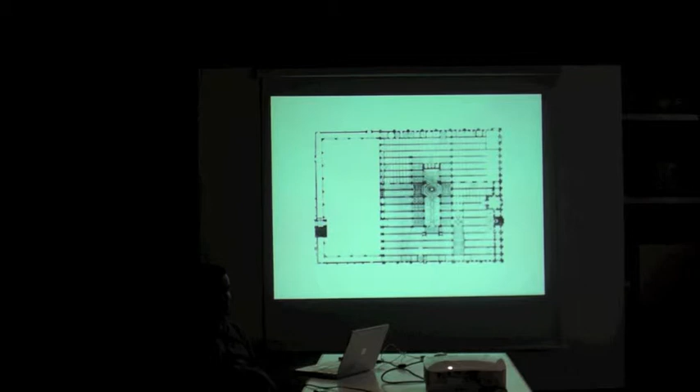Short time, as they say. Thank you very much, Jan. It's a very pleasant introduction, and I'm very honoured to be able to speak as part of this series. By no means was it ever meant to be a self-promoting exercise to include it in the Lecture SAUL series, but as it happened, we felt it was important to include some examples of recent architecture that has been headlining various matters.

I'm going to talk tonight about our only competition winning scheme in the office. We've been in practice now for 6 years, myself, Crevan as directors, Joan McGilligan as our associate, and all our many collaborators, many of whom are here in the audience. We always like to have SAUL students, and most recently Aidan O'Dea, our year-end student, was instrumental, I would say, in this competition, in his model making skills and drawing.

They say that it takes about 10 competitions to enter before you win one, and that's exactly what happened with us. We entered 10 competitions to date, and luckily enough, this has been our joy, particularly in very, very difficult times. We find, as a very young practice, it's very, very difficult to get public work of any sort, because primarily government bodies and other public clients don't trust - maybe that's a little bit hard to say - but you don't have a track record. And looking to other European countries, there is a precedent of supporting young and up-and-coming practices, and the only way, and an invigorating way in Ireland to get work, is through competition.

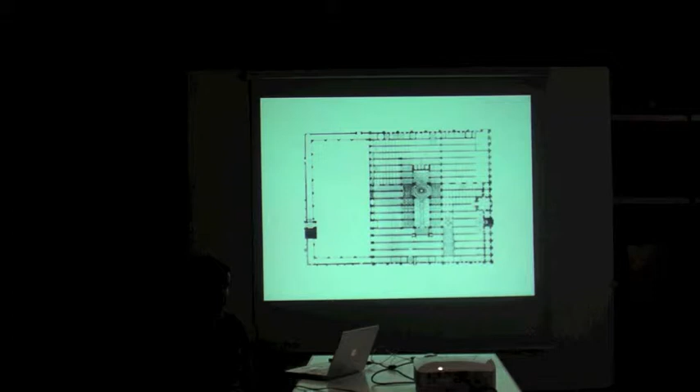There's only 2 or 3 competitions, maybe 4, maybe 5 every year, and they vary in scale from playgrounds right through to civic offices. Our professor here, Merritt Bucholz, is a prime example of somebody who has gained tremendous experience and a breadth of scope of work from that competition process. So I feel like I'm a child of all of that, still in my almost 40th year.

Without saying too much further personally, this competition happened during a very difficult personal time emotionally for me, in that my brother passed away in March of this year. So I was primarily focusing on this competition as an emotional outlet, if you like, a vehicle, and certainly his energy and his enthusiasm for life shows through, I hope, in the competition, and he'll always be remembered for that.

So I'm beginning with a building that has fascinated me since my beginnings as an architecture student, and you'll all be very familiar with Cordoba Mosque. It's the Cathedral Mosque, they call it, because it's an overlay of a Roman Catholic Christian cathedral onto a Muslim mosque. Rather than talk about the symbolism of the cross within the plan, it's primarily its abstract nature that has always fascinated me.

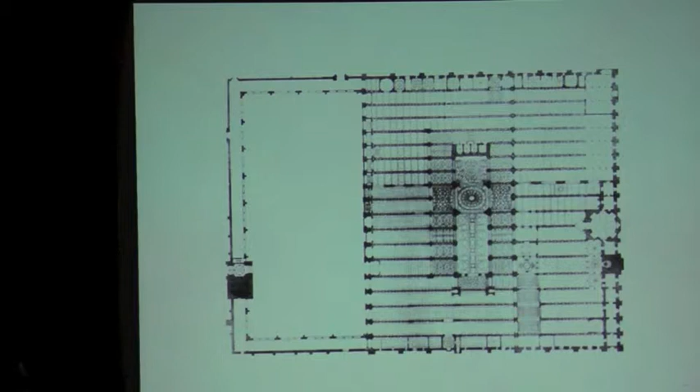It's a building of 856 columns in total, from varying stones such as jasper, onyx, marble, granite. A very, very simple perimeter wall, a very platonic shape, if you like, and that has always attracted me.

It's a monumental building of many kinds. But what interests me most, I suppose, is its multiple uses. It's not just a place of worship over time, from the Al-Andalus Muslims to a place of gathering.

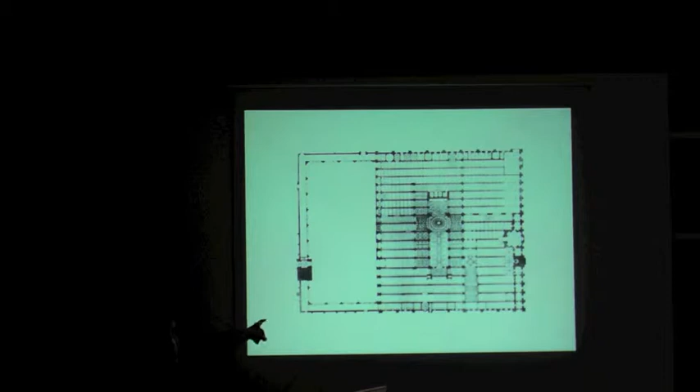In the Plaza de los Naranjos, here in the courtyard of the mosque cathedral. And it was also a place of learning, and they used to teach varying kinds of groups of people in this hypostyle hall, a multi-columnar hall. And it was also a place of prayer.

You have many prayer niches, and you have the mihrab facing unusually south as opposed to southeast, east towards Mecca. And it was also a place of law courts. So in many ways it was this very, very important civic building, and it was an open carpet, if you like, large forum in the town.

And for that reason, it has always fascinated me. And it was one of the reasons why I went to Spain to work. I am fascinated by the mixture of both Muslim architecture and early Christian to late Christian architecture through the Reconquista. And they have an incredible heritage that's there, and it's still used.

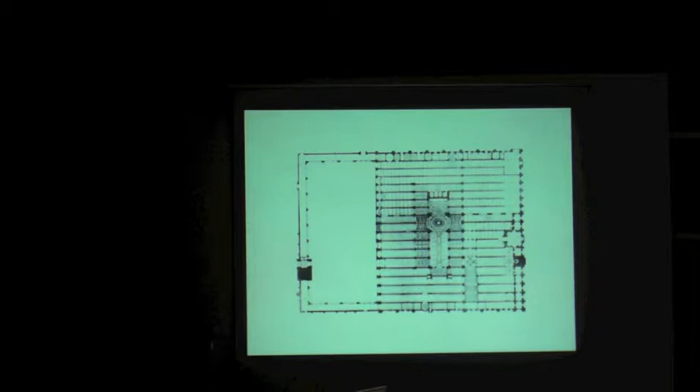And I suppose I'm showing this here primarily to show the extent of the ground floor, and the fact that the section is divided into two zones. You have the column and you have the arch. And it's effectively 3.5 meters and 3.5 meters again of a zone.

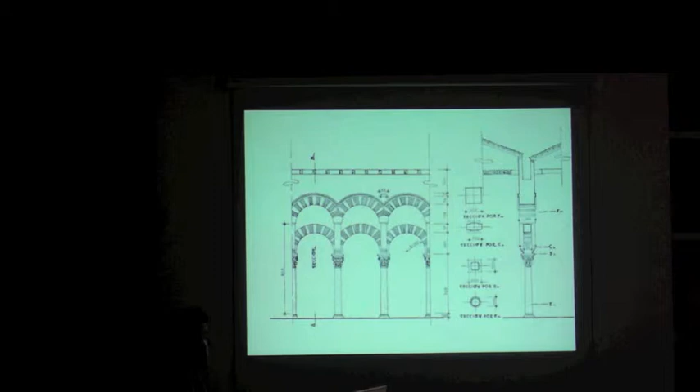And what I like probably most about the mosque itself is its juxtaposition with the old Jewish quarter of the town. It's this very forceful, square, platonic shape that hits and meets streetscapes and makes all these wonderful urban spaces almost accidental the whole way around its perimeter, while holding on to this very, very clear, formidable shape in the centre of the town.

And it's something that has kind of lived on in competitions through our office, and I'll show one or two examples of that in a moment.

The other project that I've always been fascinated with is the Danteum by Giuseppe Terragni of 1938, and he was asked by, or maybe forced, some people would say, by Benito Mussolini, and Terragni was Mussolini's state architect of the time, to build a monument to Dante Alighieri, who was a poet, who wrote the most beautiful poem of many people would say of all time, the Divine Comedy.

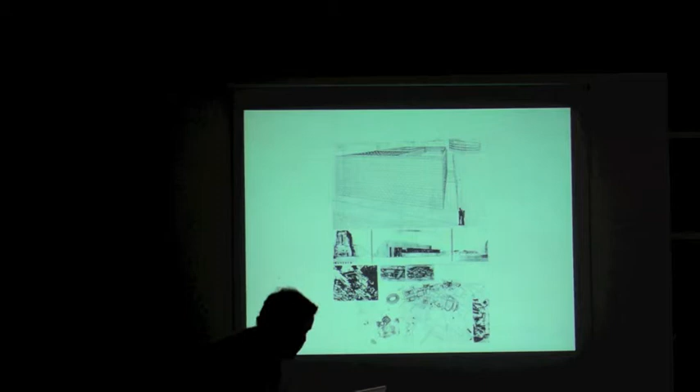And you can just make out the Danteum here. And unfortunately I couldn't get a site plan that would have more focus, but it's ever so tilted and linked to the local context. So it sets up this very, very energetic shift in plan. And in a way it is, I suppose, a metaphor for all the shifts and toing and froing of all the emperors that have made impact on this part of Rome.

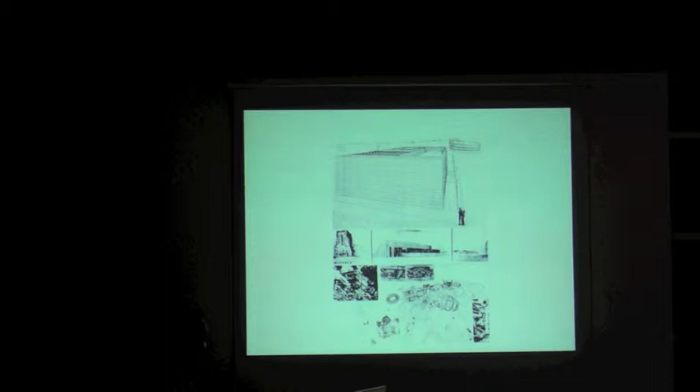What I also really like about this building, again, is its very simple, clear form and its tectonic. Immediately you can see there's an interest in the making of the building. And down to its coursing of ashlar stone, you can see the banding of a band to 3 bands to a band to 3 bands. And the various staggerings and coursings of the stonework on the outside elevation.

But equally intriguing is its plan, and something that I've always been intrigued by. No model or drawing will ever kind of satisfy my intrigue for this plan because it's so mysterious and abstract. And I suppose it was a translation of a translation.

Dante's Divine Comedy was very much structured around Byzantine churches, as it is said to be. And this is a translation of that translation in that here is Terragni thinking about the structure and the rhythm and the form of the Divine Comedy in a path from dark hell through purgatory up into paradise.

So you have this very interesting intramural relationship between spaces. You don't know whether you're within a wall or within a room, or whether the wall is supposed to be read as a singular wall. It's a very intriguing thing, more about the interstitial space - try to describe anything in there that is interstitial.

It's almost like every corridor space is useful of some nature. I particularly like the strong graphic of this multi-columnar space up on the top left through to the massive columns of purgatory, this weighted ceiling, and this very interesting section up above - quite a compact form, yet spatially rich and intriguing.

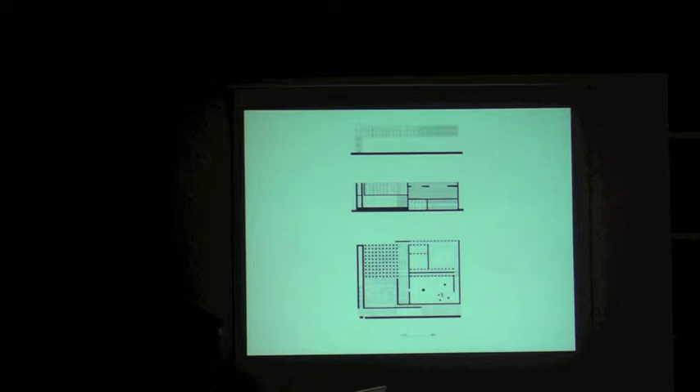If I can jump onto a project which we almost won last year, the Europan project in Ballymun in Dublin. They were looking for 50 residential units and the reuse of a boiler house, which was the central heating plant for all of the local authority flats in Ballymun.

Rather than knock the boiler house, which the majority of the contestants decided to do, we decided we would keep both the chimney and the boiler house - vestiges of that latent history that Ballymun had and is beginning to lose slowly but surely because of its regeneration programme.

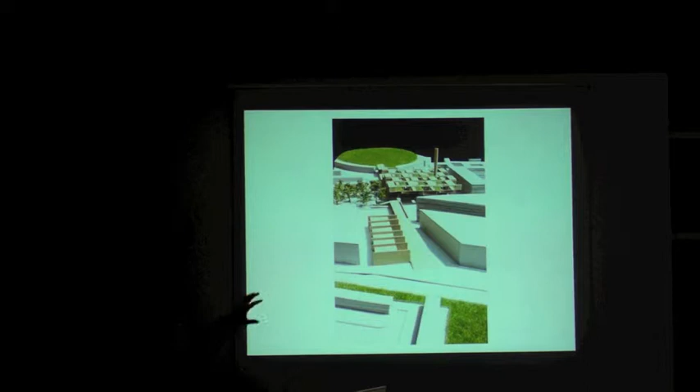So we proposed this very strong square form - something that appears a lot in our work, this simple form. A bridge that connects a number of intended linear parts across Main Street. It was meant to be a counter-axis, interlocking with this floating roof which had penetrations within it to allow light to come through.

I cannot say how important another student in the college year was to this project's development, and that's Sinead O'Shaughnessy. I don't know whether Sinead is here tonight, but she was instrumental in this project coming to fruition.

Like a competition, you only have two or three weeks to throw your hand at something, so you really are using all of your capacity and ability within a very compressed, shortened time, and under many demands as well, given that we have the practice and that we all teach as well.

A very simple metal form with concrete pours that kind of mimic, or have a mimetic relationship with, the concrete column of the central boiler house.

We turned that into a studio, and we kept the red colour because of this very distinct emergency red colour that it had. And the chimney, being close to Dublin Airport, was to uphold its kind of red and white branding.

So Tullamore - a place I had actually never been to. And John, I swear if you tell this to anybody or Offaly County Council - a place I had always had very strong desires to go and visit because I had heard it had a very striking architectural built heritage, and when I went there I was not in any way disappointed.

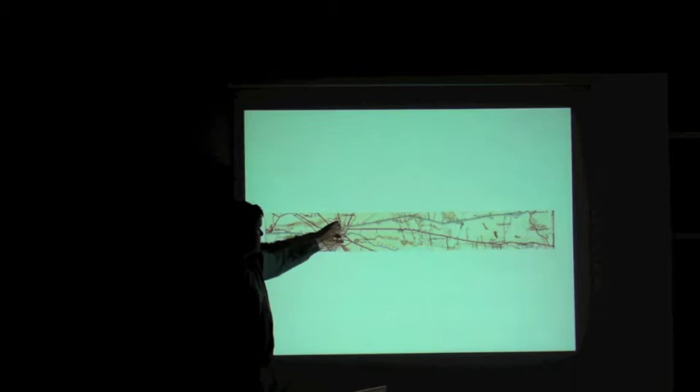Beside it, you can see the small green spot within the town, slightly in the backland, not necessarily the most important part, but you have the main street here, Columcille Street, and Patrick Street, with various important churches around the town, and this wonderful Charleville estate that holds the Castlepalooza event every summer. So a very interesting setting.

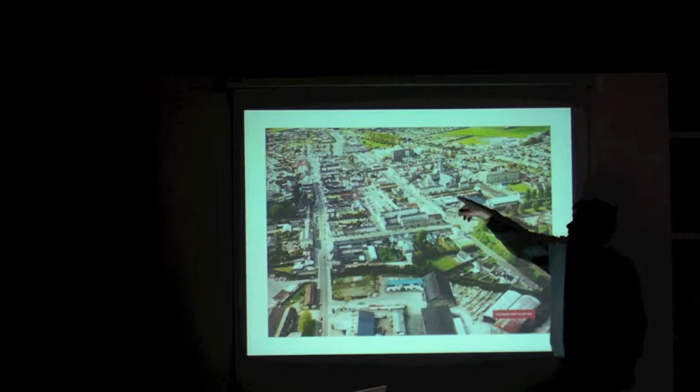This is the town itself. You can see the basin I was just describing, about 45 to 50 square metres in size to allow for the barges to turn and go back out. It would have been a miniature version of the Grand Canal Basin in Dublin, so you had this kind of relationship immediately with Dublin.

Quite a formal street. You can see very fine urban spaces like Market Square, and the main street leading on towards the jail and all of the later 19th century extension of the town out towards Carroll Estate.

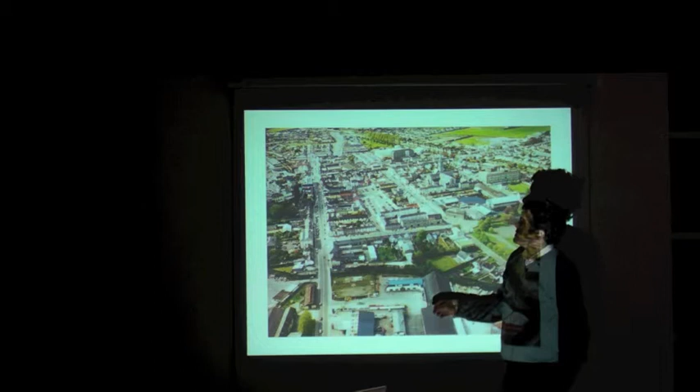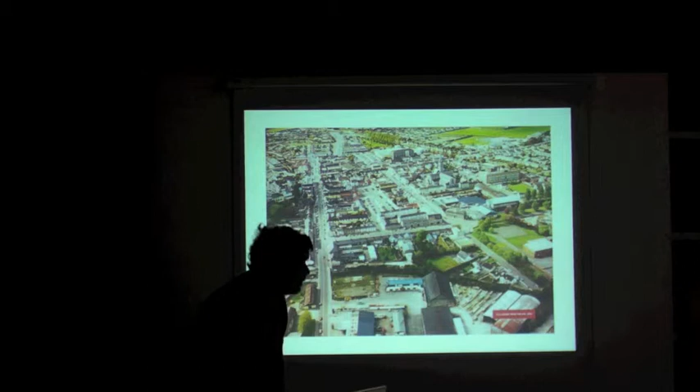Here you see the site with this very prominent grove of poplar trees, over 30, 40 metres in height, and quite formidable in size. So that was one of the factors we had to deal with.

Here's the site from Clontarf Road. Something the competition brief didn't highlight at all was this very handsome terrace of Frank Gibney houses, the Bord na Mona architect, who's very underrated in Irish housing terms. Very interesting mixture of gable and elevation, roofscape particularly - a three-dimensional and developed sense of roofscape.

And again, you have this beautiful body of the Grand Canal that is at a height in relation to the site of Kilbride Park, where our art centre is, on the right-hand side. So the water level is higher than the park, giving you this very interesting sectional relationship.

So, thinking about what was stirring us, this is a bog cutting, for anyone who doesn't know what it is - basically a layered-up raised bog. You can see the cuttings and markings of the sleán that cuts into the bog, and it's being collected here by one of the turf cutters to be laid out and dried.

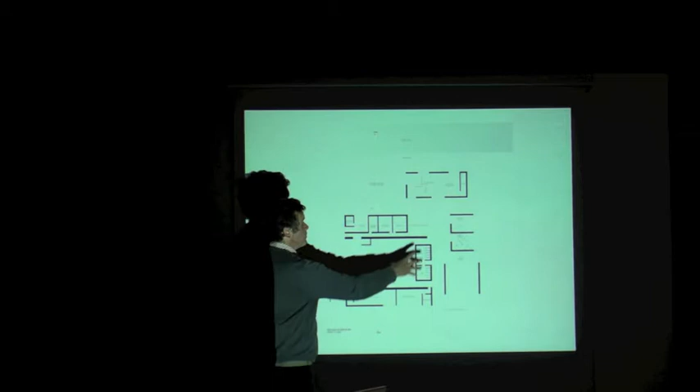We were trying to reduce the amount of circulation within the space. You have an entrance from the town, you have an entrance from the Tullamore Centre where buses would arrive. You have a relationship directly to the canal, and particularly because it was north facing, that provoked an interesting discussion for us in stage 2.

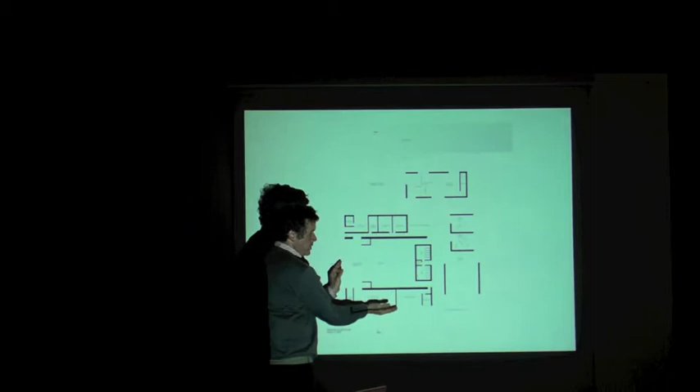You have the theatre that faces towards Kilbride Park, and you have various administration areas and an arts space. So in a way, unlike the court of a mosque, it's a square form, but it has a very, very strong relationship on all sides through the arts rooms onto this kind of triangular space we're developing here and onto the canal. So something reactive, yet permeable and flexible, and it was there from the start.

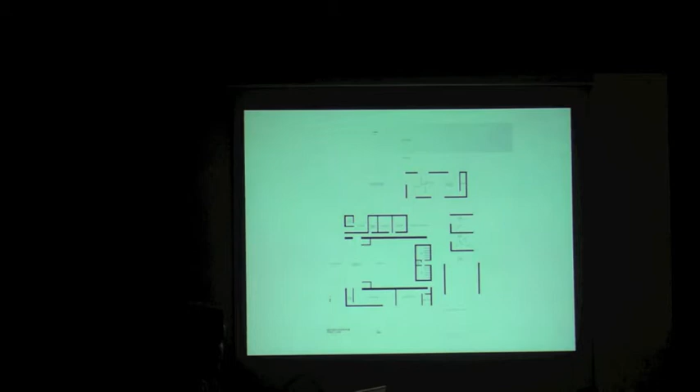And our plan changed very, very little beyond that, beyond a few technical aspects that were accommodated.

So this was stage one model, and I'm going to show you the panel. It was the 1A1 submission. In many ways you might make the most beautiful models, you might make the most beautiful drawings, but you really have to sell yourself through as punchy and as impactful a presentation as you can. We had a lot of engine power in our office, what with Aidan and me.

So Aidan was brilliant at making models and crafted some very beautiful facades for the models. This was supposed to be an all-timber building. We were trying to make this both an essay in sustainable but also quality architecture going forward that would represent a new kind of not just a new arts centre type, but a new way of moving the town forward.

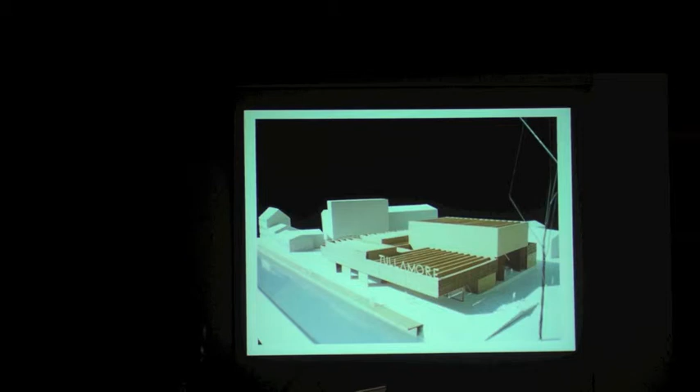So the competition panel itself, you can see here, we start with just an overview, some elevations, some key images, a site model showing the line of the canal being the driving force behind this whole thing, the plan on the top corner, and then a series of models showing the various sides and facets of the project.

So not going into too much definition on many things, but understandably for 2 weeks' work, we were pretty delighted to get into the shortlist.

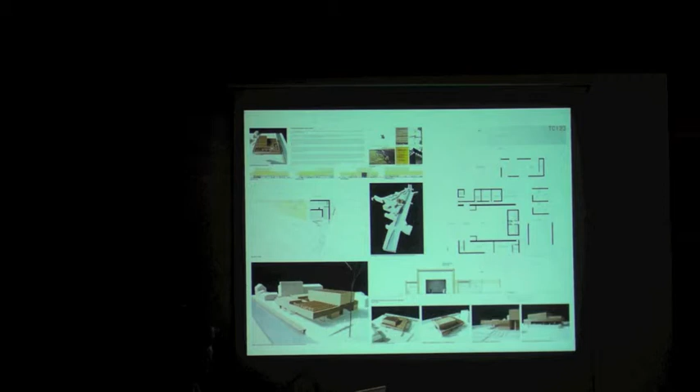So having got into the second stage, we started to think about how we were going to develop this, because you get so attached to something from a very limited period of time, needing to develop it within 6 to 7 weeks into something you would happily show and get costed, engineered, and landscaped. So we had quite a lot of difficulty in the first few weeks trying to loosen ourselves up and make sense of how we might develop this thing, because obviously we felt it was perfect.

There's no question it was perfect. We did not want to change it. So I'm plotting with nothing serious. This was a model about the size from my hand to my hand, about 3/4 of a metre long. Again, a very quick, simple model to show the extent or effect of this very strong architectural bomb, as Yvonne Farrell very kindly called it, about 2 weeks ago.

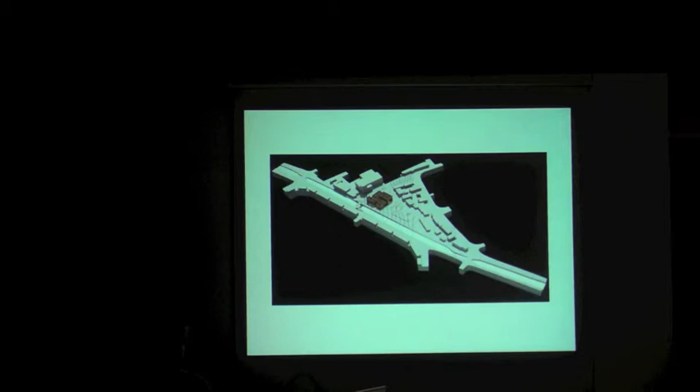You can see the simple form. It's 4 blocks effectively, which became 3 in the end, and they all spin around a central space, which is the foyer. So a 48 metre square plan is a very deep plan, and to get light into that central point, we wanted to make something that would be the new centre for the town, that everybody could come in and out of. So we thought of this kind of pantheon light, a very strong centralised element, and I'll talk about that in a minute.

We worked with Dermot Foley, landscape architects. We worked with Dermot previously on the Lisbon Architecture Triennale, he was one of the contributors along with ourselves to that exhibition back in 2007. And like anything, when people begin to interfere with your scheme, you're totally offended. All of a sudden all these lines and scrapes across the site started to appear, and I was like, Dermot, what the hell are you doing? Why are you proposing all of this? But you begin to soften into it, because obviously you're working in a team. As an architect, you have to work in a team.

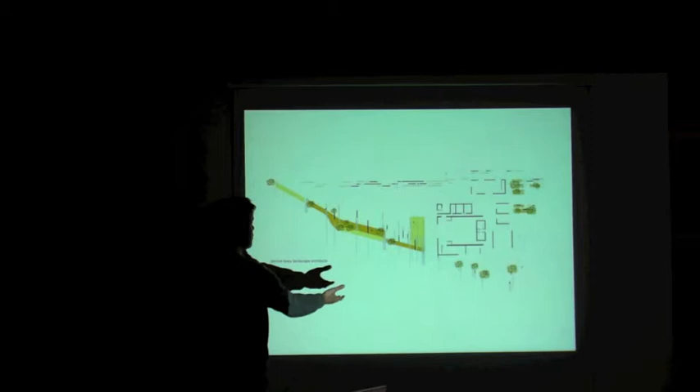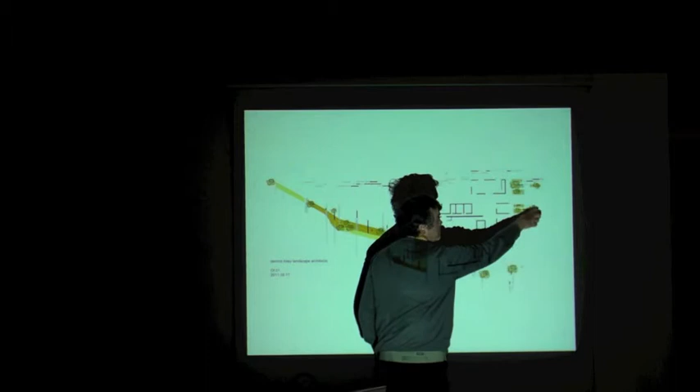So he had this very nice notion about lines coming from the townscape, lines along the canal, simply blocks of limestone and concrete, sometimes suppressed into the ground, sometimes rising to bench height. Other times lines that would terminate in a tree, and one specimen tree that we grew, which was an oak tree, and I'll talk a little bit about that in a moment.

But like everything, it takes time to digest landscape architecture, particularly when we were thinking about something only from the point of view of form and shape and use. It was interesting to see a further development of that at a landscape scale, particularly in a park, an urban park like this, pocket park.

There were very beautiful drawings made by them, with incidental little things like permeable footpaths. We're proposing a SuDS system for the park that will collect all of the wastewater from the roofs and will drain into a drainage system that will prevent any kind of attenuation on the site. So in a way we're putting as little pressure on the public sewage or drainage system as possible.

Dermot and Simon at Dermot Foley Landscape Architects were developing this notional idea of a path breaking down, a kind of blurring of division between planted area and paved area. Again, very simple concrete pavers, because that's what the budget would only allow. Eventually it settled into a kind of half-baked scheme where we were getting things that we wanted and he was getting other things.

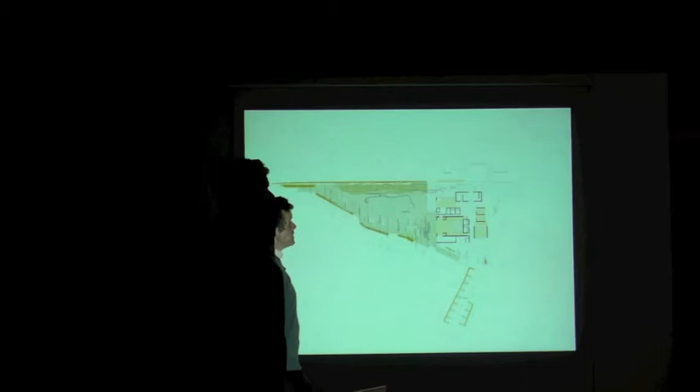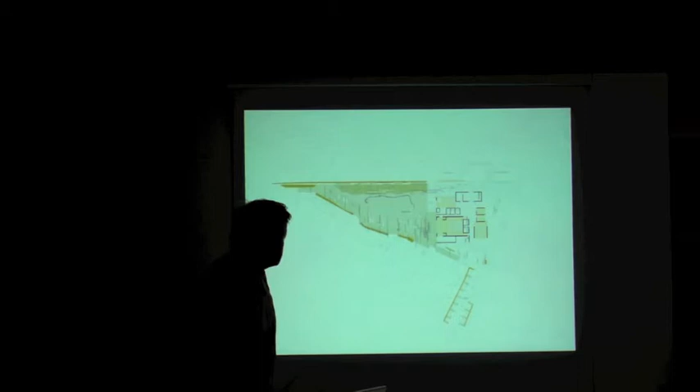One thing we kept within the site was this footprint of an old quarry. A lot of the limestone for local churches and for infrastructural works like the bridges crossing the canal came from this site. Up until the late 60s, early 70s, it was a rubbish tip. So we very much impressed upon the jury that this was really the only place to build, because you never knew what might happen if you were to build on a dump. That was an interesting point of discussion, certainly when it came to the jury writing their report and considering the other entries.

We had a notional environmental strategy where we would collect rainwater on the roof of the theatre to be collected in a tank over the control room, and that would feed all the toilet block underneath and any of the sinks to the arts rooms around the space. And we're provisionally wiring for solar panels that go south. We can't afford the solar panel, but we're providing for the wiring.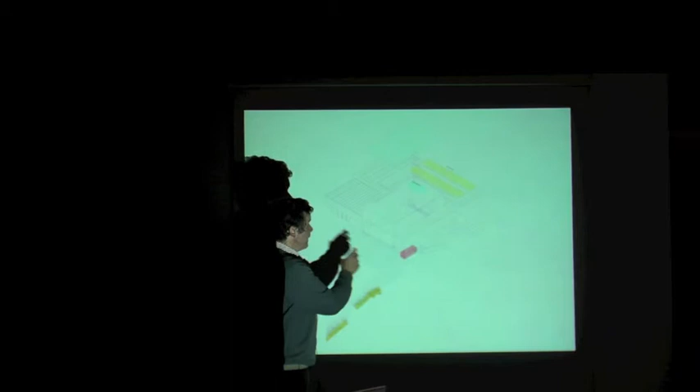And then there's a biomass unit in a semi-sunken basement closest to St. Kieran Street here, which is kind of the only real place where we could manage to put it. But it will be interestingly developed in the next number of weeks and months.

He has this wonderful ability to whittle down and summarise what the structural intent is in a project. I've seen him work with students, particularly in 4th year and 5th year, where he's able to get to the core of the architecture and the making of it.

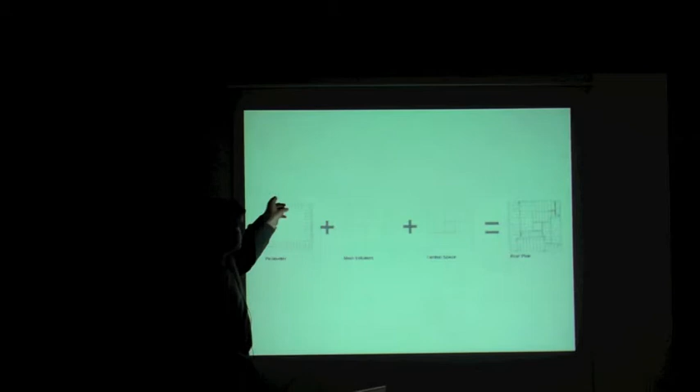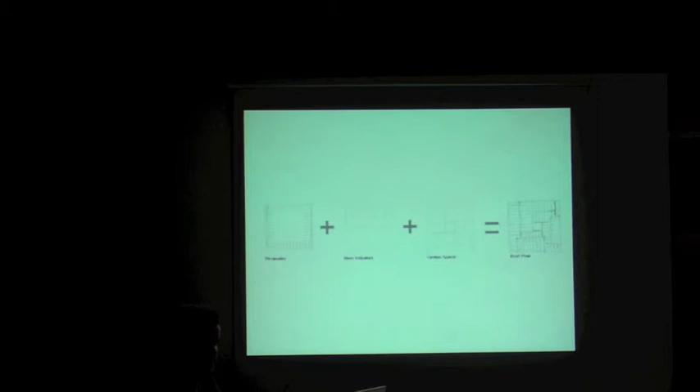So he came up with some very nice ideas about the roof structure. Notionally, it's this bound perimeter form with 3 volumes that pop up beyond the perimeter form. It's overlaid with a kind of rigid cross pivot form with a system of beams, and then somehow they're all brought together into a more complicated and ambiguous roof plan, a medley of all of these 3 notions. It seemed like the obvious thing, but when it was drawn for us, it was a revelation, a revelatory point to make.

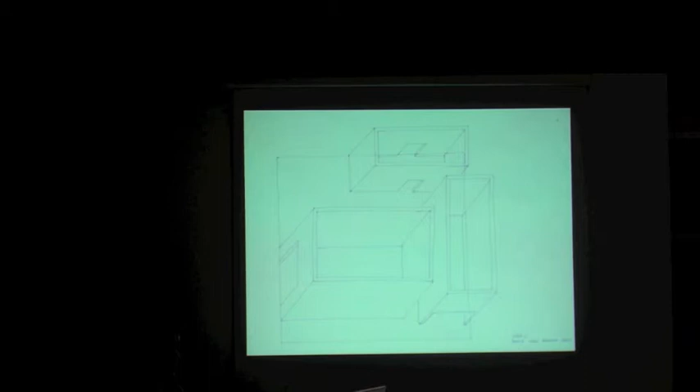I think that's the most satisfying thing about working in a design team. As an architect, you're working with an engineer, a cost consultant, a mechanical and electrical engineer, a landscape architect, and all the various specialists. And when you're working in orchestration with all of them, it's a truly remarkable feeling.

He did all of these axonometrics very quickly for us within the first few weeks of the project, trying again to summarise the various moves. This is an overlay of a perimeter laminated beam, which is 3.5 metres high, cantilevering out to erode all of the corners of the schemes, and bracing all of the 3 volumes together.

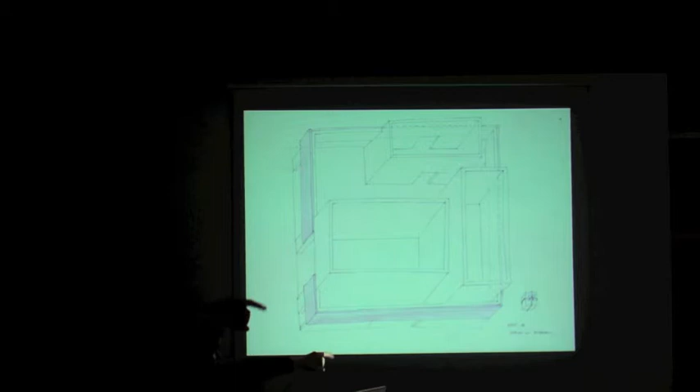This is the ribbon element, and you can see Tom's little caricature there at the end, the box with the ribbon tied around it. This is to be the Corten steel band that we were bracing everything with eventually, from a weathering point of view.

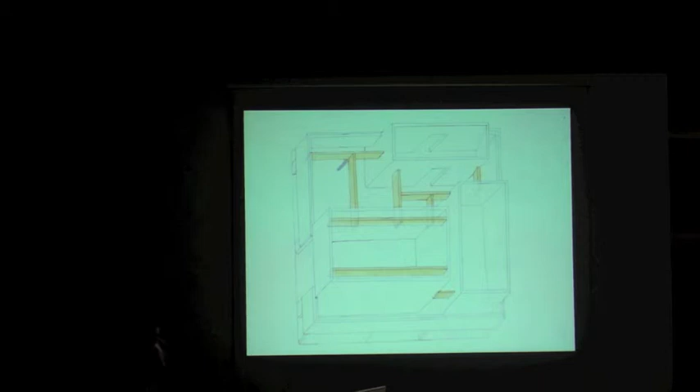And then the overlay of a secondary structure, which are these 1.5 metre deep laminated timber beams that take all the tertiary joists, or curtain beams as we're calling them later on. Obviously with a beam you can only do so much length before you need to consider supporting it from underneath, and with timber you have to consider the length of a tree, which generally tends to be 4.2 to 4.5 metres in length.

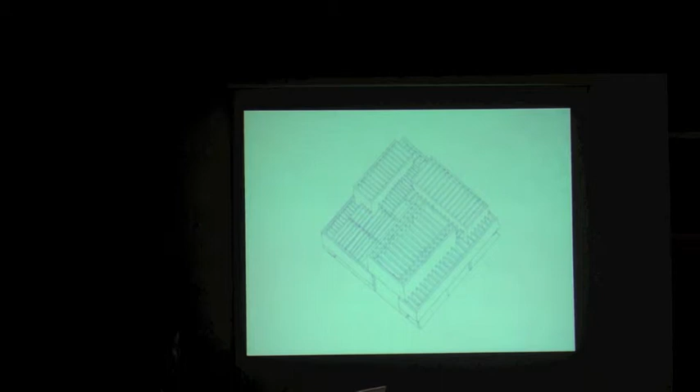So we worked with Tess, Tom's company in Paris, and he developed this very nice system of volumes, beams, support columns where we were requiring them, and the secondary and tertiary beams. And then very nice drawings from Tom again, which are always a pleasure to open up on your computer when you get them. They completely summarise everything, and you're just forced on to the next stage in terms of development.

Now I'm no expert in bending moment diagrams, but maybe Miriam in the audience, I don't know whether Miriam is here. Yes, Miriam, you might be able to explain something to me here. Positive and negative, yeah, very good. I mean, I don't understand it, but I love it. It's just one of those intriguing diagrams, the working of it, the forces at play.

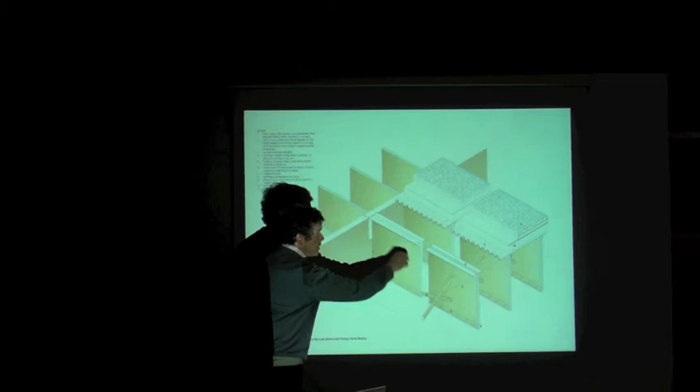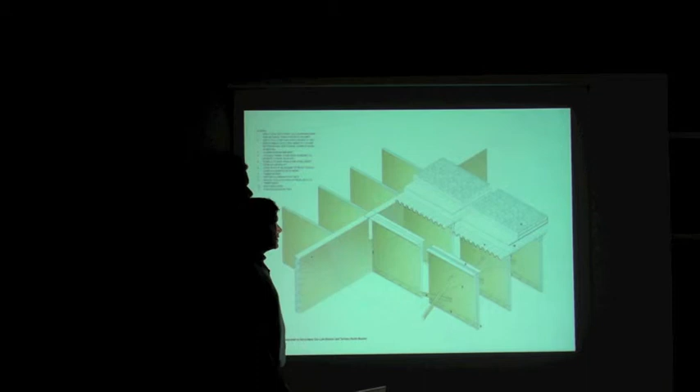This was the junction of the secondary beams, the 1.5 metre laminated timber beams, and then you have these very fine thin curtain beams, which are 75 mil thick, braced with these noggins, if you like. I don't know whether you've ever taken down an old Victorian ceiling, but very often they braced the joists together to prevent buckling or twisting or any kind of lateral force in them, to stabilise them.

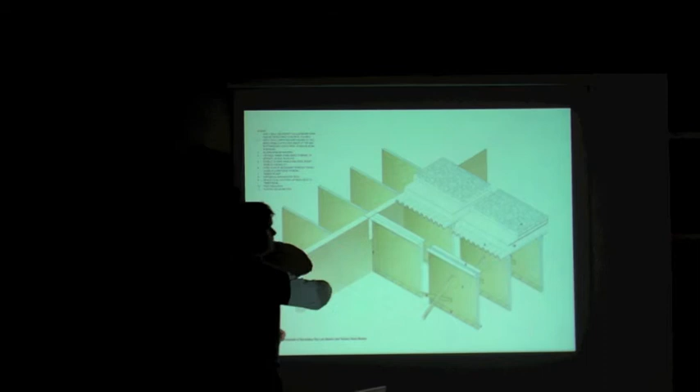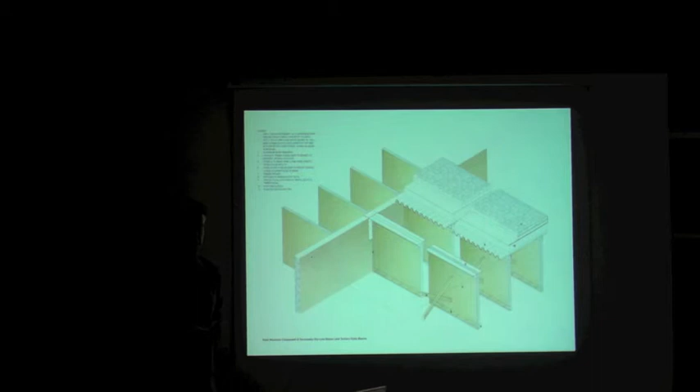So we were thinking very much on a basic principle level of how we might brace the deep timber beams together. All that we could afford on the ceiling was a raw aluminium deck that would be going from beam to beam, and we were very keen to offset any of the carbon footprint of the construction. So we are insisting on a sedum roof on the top, hopefully so it can act almost like a bog in itself, as a kind of carbon sink to the building.

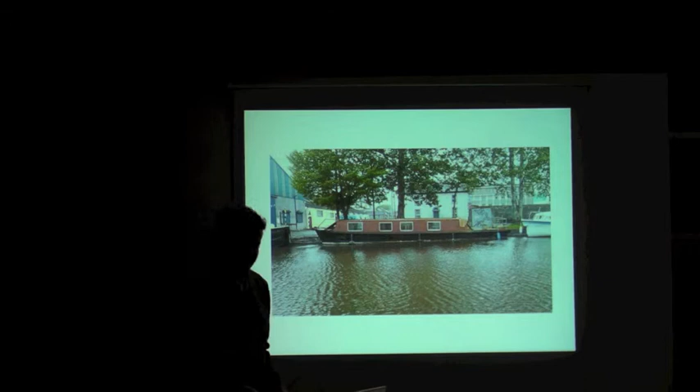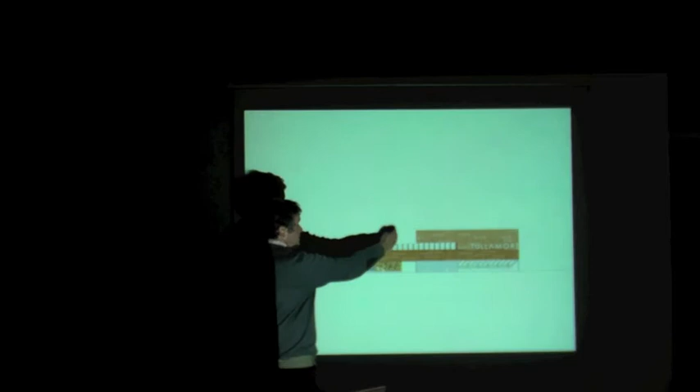So our form, in many ways, from an elevational point of view is very simple. It's all drawn with horizontality in mind, with an accent, a counter accent, being this beamed roof system. We were keen to strip off that piece of the elevation to reveal the support of the beam onto this larger 3.5 metre deep beam.

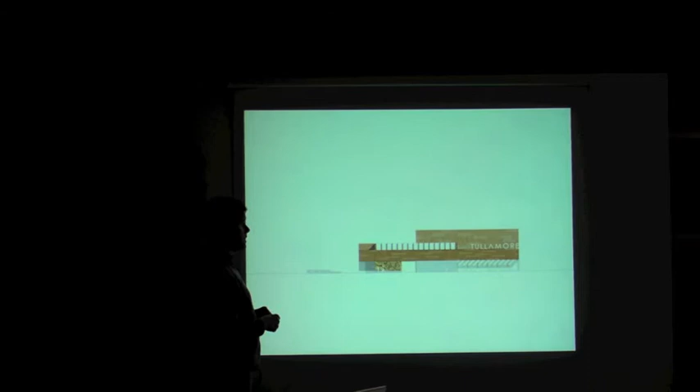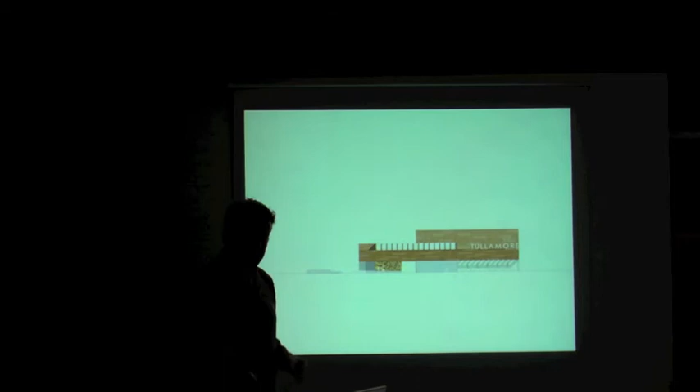Along the base we were making a limestone base, which is probably going to become board-marked concrete now because of cost — apparently it's quite cheap to do board-marked concrete now, lo and behold. At different corten steel panel heights to the lower part, you're getting a tighter dimension relating the 3.5 metre deep beam to the volumes that pop up from it — very slight but subtle differences in the making of it.

This is going around the art centre, so you get a continuous beam the whole way, and we were keen to work the signage of the building into it. Cleveland is a big fan of 60s illuminated pop lighting, so he was very much into the lettering and signage, and the integration of artwork into the building as something not meant to be a work of art itself, but a developing form within the town.

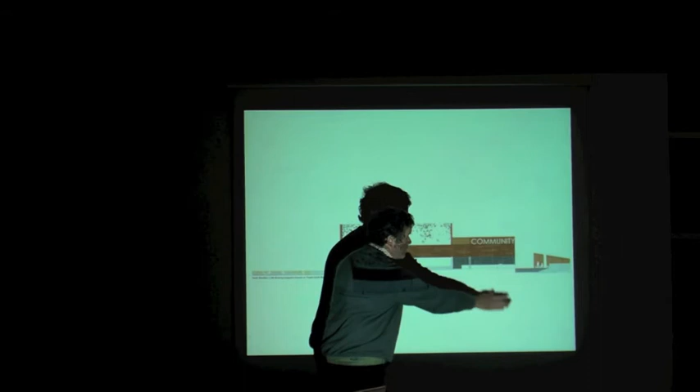We integrated the sign as an idea of a billboard to the town side. This is the elevation to the south, with a stepped area here coming down to the town, about a 1.2 metre height difference. Going back a second — one important point was that we were very keen to maintain the datum height of the canal bank, so everything is flat and universally accessible inside.

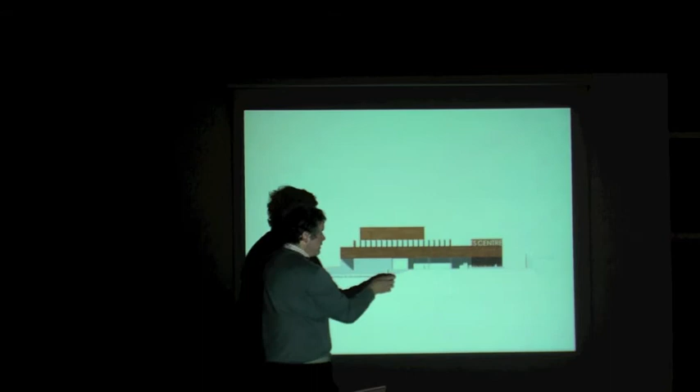Any of the developing, changing levels happen towards the town, allowing for pleasant south-facing stepped areas. Then twisting around to Kilbride Park, the theatre doors were to be openable — they wanted a reversible stage — so we used that opportunity of the stage door to develop artwork, choosing one of Louis le Brocquy's garden tapestry paintings for it, as long as he doesn't sue us for use of his work, fine.

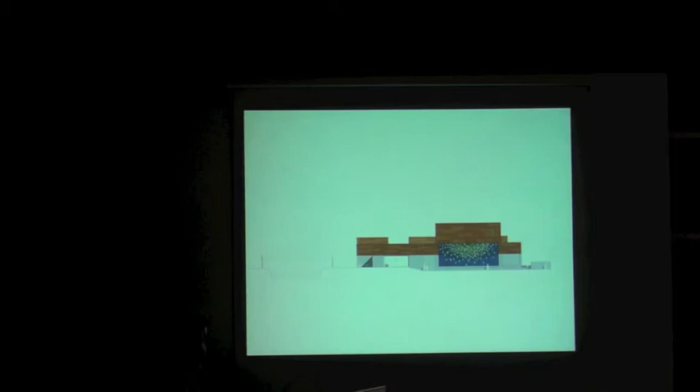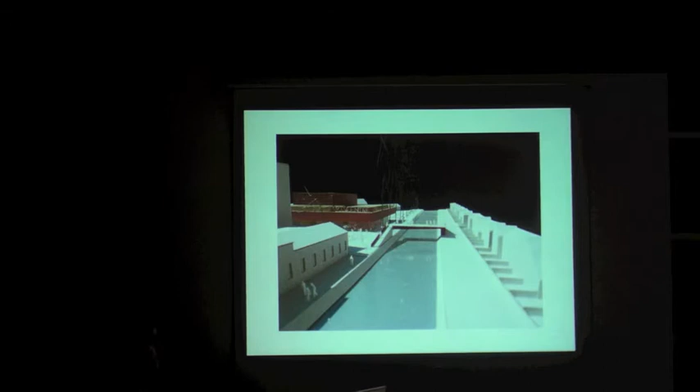These are some of the models again; we spent a lot of time developing the model. Thinking back to the timber stacked facades from stage one, we now have a corten ribbon that dresses the whole building, giving it that weather-protected skin like the old crannog man. We had to notionally suggest a bridge crossing the canal at this point, so we made a sculptural form that would respond to openings in Gidley's housing as well as form bookends to the town spaces we were making.

So you get this kind of quite dramatic triangular form space with the old mill tower of a flour factory. This is the beginnings of the Tullamore Community Arts Centre. And this kind of very clear, simple form - we purposely made the model without the roof to express the structure and the rhythm of space inside.

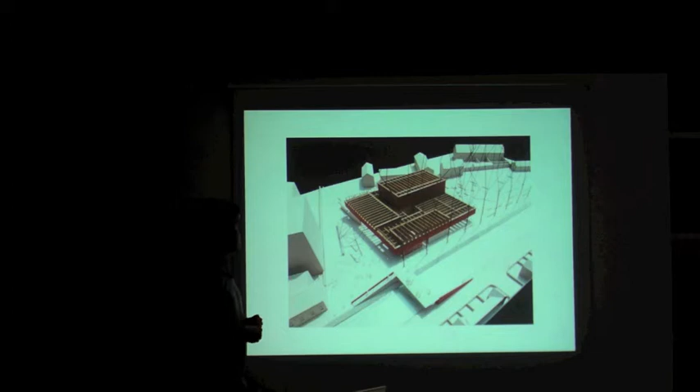And you can see in the centre of it is this, as I was describing it, this little Pantheon roof light. I know we went to Rome a number of years ago with our students, but there's something very striking and strong about coming into a relatively darkened space to have this oculus in the centre. And in a way, it becomes in itself an art space, in that the theatre, the arts rooms, the gallery and the cafe all react around to that.

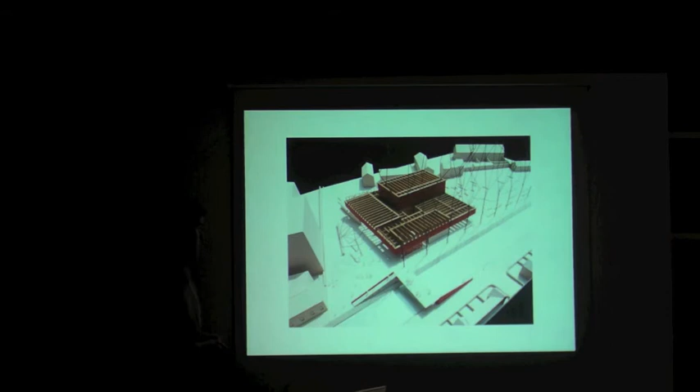We have to maintain all the poplar trees, so we pushed the building back. Originally we had proposed to get rid of them because we liked the proximity and the potential for reflection from the canal water, but we were forced to keep it. So that's going to be an interesting scenario as to how we maintain the root system of trees that are over 30 metres high and only 10 to 12 metres from the building itself.

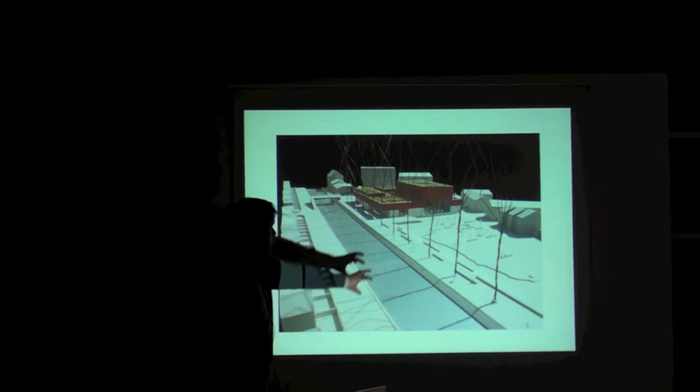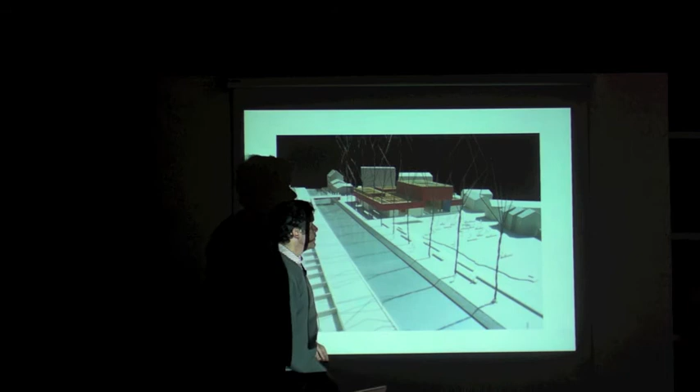Some other views - this is again from Clontarf Road, hanging over Gidley's housing and looking towards the park where you have these blocks of limestone and concrete, and the bringing around of the promenade into the park, allowing for a terrace that faces west in the evening time. We were conscious that any theatre going, concert going, or gig going crowd would enjoy the setting sun in the evening and the potential to open up these doors to the pocket park within the town itself.

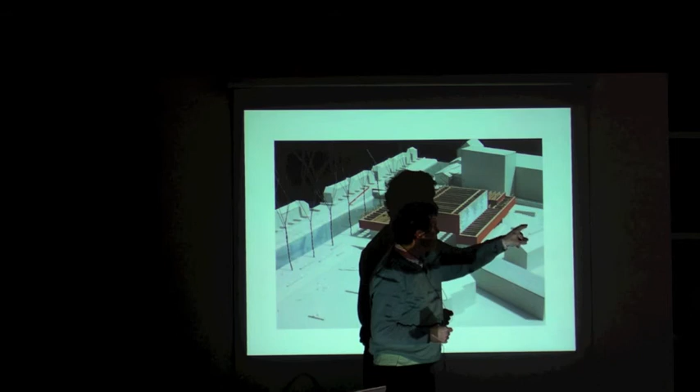And then this is looking from the town side. You can see the sets of steps coming down here that make up the difference, and then the ramp that comes around within the sculptural kind of Z shape to bring you back to the same point.

So the plan itself - the only thing we did was kind of decorate it with some surface. We decided on a concrete polished floor and to cut in the expansion joints, or saw cuts, into the floor to give it a measure as opposed to just pouring the floor. Some timber floor was required - a sprung floor was required in the theatre, in the arts rooms equally timber was required, and in the cafe. We decided we would extend it and make it a slightly larger cafe than was required.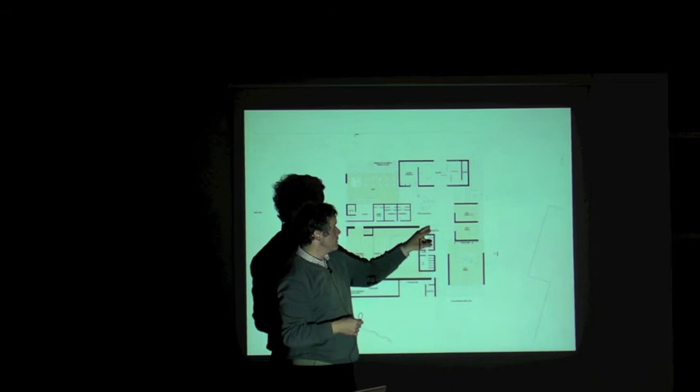And the gallery and the gallery workshop, again, you can see are quite central to this space, the common foyer space with a very large roof light overhead. So everything effectively means that this is the centre point of the scheme, and it effectively reduces the amount of staff required from this entrance and from the entrance to the town. So it's one single focus, with the director and the administration wing to the south. Again, you can see very little circulation in this.

This is the green rooms and dressing rooms to the theatre that have access to the stage. Very little circulation here, and this is meant to be the route from the town, slightly compressed and opening up into the foyer as it makes its way towards the canal.

So inside, this was a large 1:50 model which we only completed last week. This shows the scale and the rawness of the space itself. We're very aware that the money will need to be stretched as far as it can on the scheme, so we're keen that everything in its capacity can be exposed.

So we have these, what we consider to be, very thin and elegant, deep, thin columns or beams - curtain beams - and then the secondary beams, which should be picking up - they're not picking up in this model, but they'll give another measure to the space.

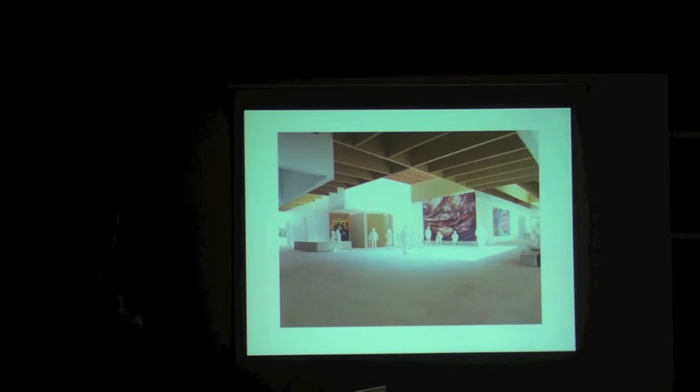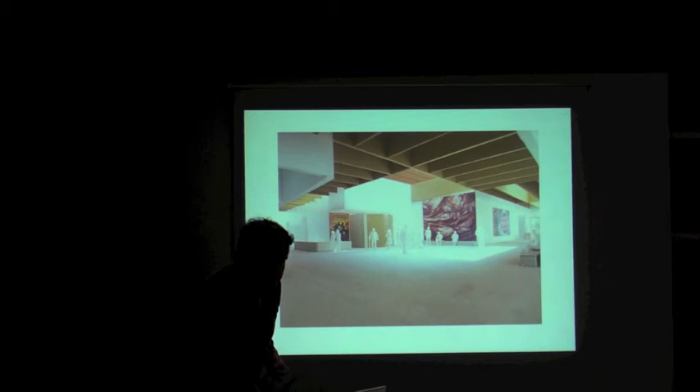Obviously, with a repeated roofscape, you're given the opportunity to bring in as much natural light as you want. So there's an interesting features pattern across this whole roofscape, and that was something we were very interested in developing - this kind of almost elaborate roofscape - because we knew it would form a very important part of the sense of space within this building. So this is the large roof light that I was talking about.

These are some of the cuts to bring south light into the cafe. We wanted the cafe to be as close as possible to the canal, but it would be north facing, so the only way to counter that was to bring in south light. We didn't have any south light in stage one, and it was something constructively suggested to us by the committee. Then you have large hopes into the gallery space, the workshop beyond, and small things like children's corners within the cafe.

This is the gallery space. Again, it's quite effective to make models and take photographs of them - you can get very realistic, clear senses of space. We were keen to promote local things like the Book of Durrow.

A disc that was found in the bog, a drawing of a photograph of the King's Oak in Charleville Estate, and a work of art by a colleague of ours very much interested in energy and power. Given that we were working in the centre of the bog, we were thinking to include one of John Gerrard's works as a push forward in that sense.

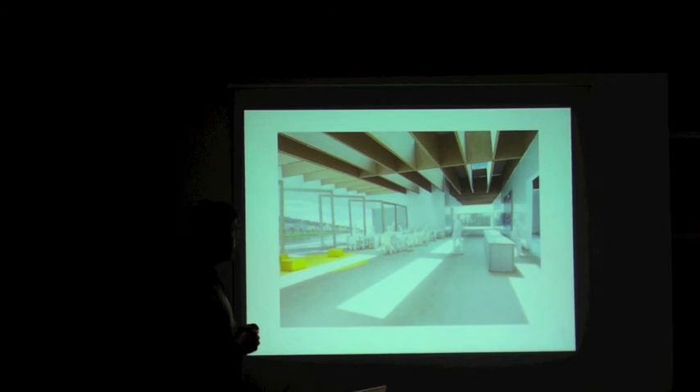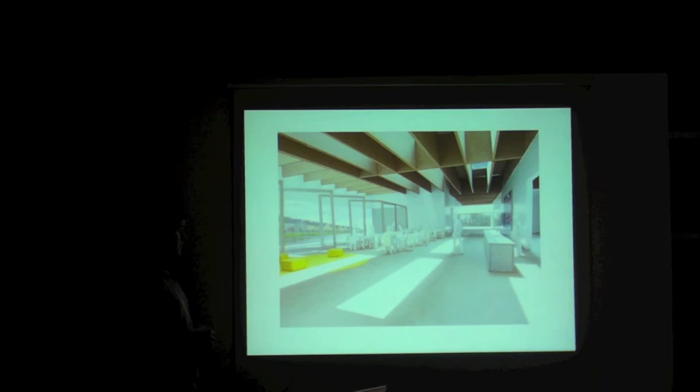This is looking from the cafe out towards the canal, across to Frank Dibney's housing. You can see the height of the water being quite proximate to the height of the floor of the cafe. One very simple counter, like a block of the park, effectively a bench-sized block that was meant to be the server unit, and you have this dramatic system of tertiary joists, or curtain beams as they're called.

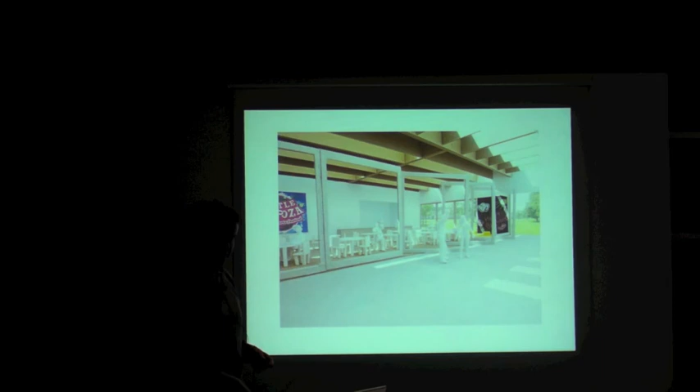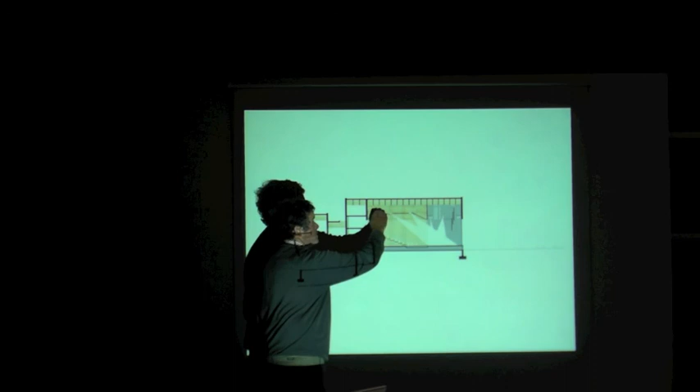Then the theatre - a very simple space again, not much money to push on this. We chose a banding of plywood for the walls internally and reflectors to the ceiling, with the exposed beams again to soften the sound, and various things like retractable seating.

This is the collector for the water, and it's been brought down through the control room back area and into the toilets, so quite a clear path back.

This is a photograph of the Joe Dolan concert, as we were calling it - we were trying to find a plastic figure that looked as much like Joe Dolan as possible.

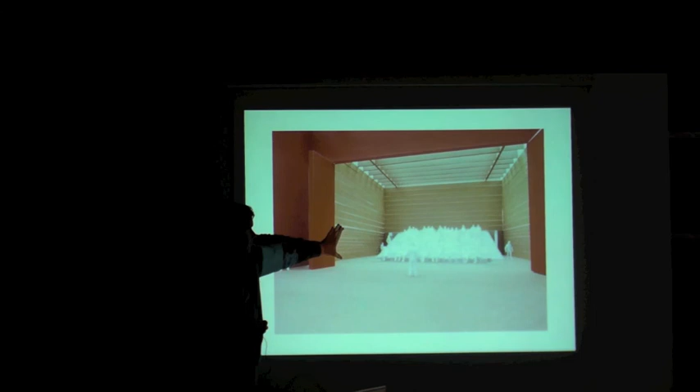You can see the narrowed bands up to door heights, and beyond that the increment of the panel gets larger - scaling up like many facades you get in classical buildings. We were keen to give a measure to these relatively simply adorned walls inside.

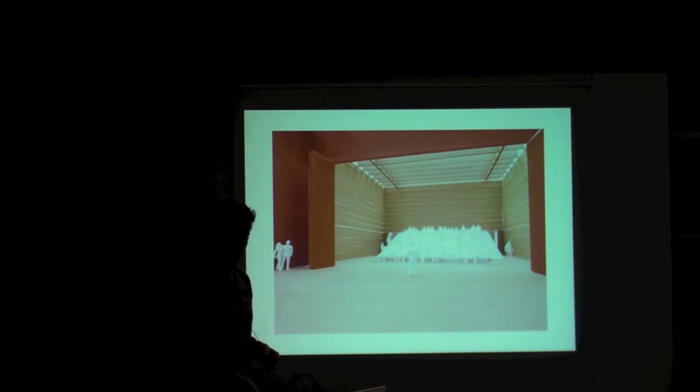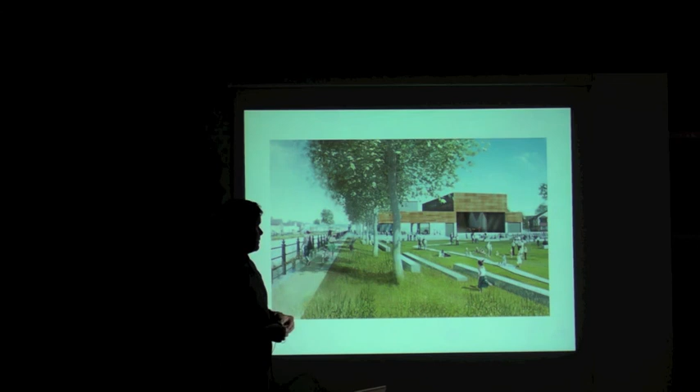Here you have a relatively low maintenance canal side with blocks of concrete and limestone. You have the terrace of the cafe coming around and making slow steps down to the service entrances to the arts centre, with things like the family areas relatively obvious.

Coming from the Tullamore side, you can see again the eroded corner, some artwork that we integrated in - this is the Irish Triskelions again - and this notion of development which will happen along the promenade of the canal.

One thing we were keen to develop was this specimen oak. Poplar trees aren't necessarily native to the Midlands - they were purposely put there for functional reasons, to reinforce the embankments of the canal.

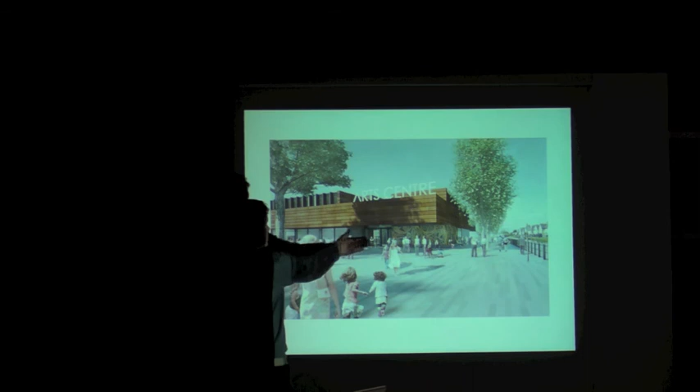We were keen to have a dialogue with the King's Oak in Charleville Estate, so maybe over the lifetime of this arts centre there will be a similar plant for everybody else to rest under, on axis with the entrance - a nice dialogue between the growing tree and the art centre developing as a centre for amateur and professional art.

And then to finish on the photograph of the community art centres - it's important for us that they called it a community arts centre as opposed to an arts centre, which made a huge difference to us entering the competition. We felt it was an interesting, albeit subtle point, that they were pushing this more democratic, open and permeable, reflexive form within an Irish landscape.